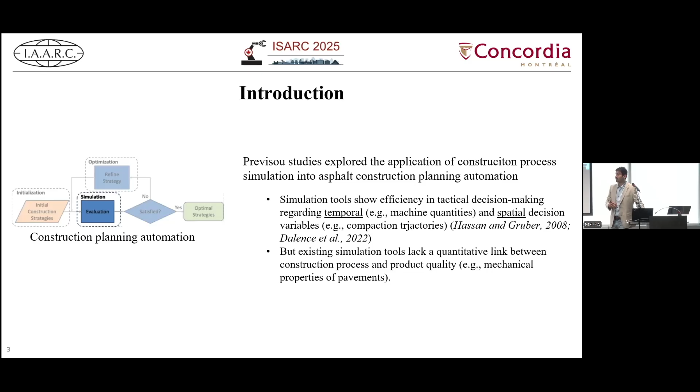And there are no, let's say, technical supports for the planners and the tactical teams to be able to understand and evaluate their different strategies. And normally they rely on their own past experiences. So over the past few years, focusing on hot mix asphalt specifically, we tried to develop simulation tools that would allow the tactical team to play around with their compaction strategies.

And when I talk about compaction strategies, it's mainly about the temperature window that the operators have in order to compact the asphalt. And that temperature window is actually quite small because you can't compact the asphalt when it's too hot. You can't compact it when it's too cold. So getting that compaction window right and then steering the entire process so that all the compaction is done within that time frame is quite tricky.

But then the main problem with all these simulation models that we've developed, and these are high fidelity simulations with very precise visualization, is we assume if a certain number of compaction passes are done at a certain temperature, the asphalt quality is good. And that's a wrong assumption. Because a lot of times, especially with warm mix asphalt, because you have a lot of additives, the way the material would respond to the changes in your strategy would be quite different.

So inherently, you need to incorporate some sense of physics into your model so that once you're simulating, let's say, different strategies of compaction, the asphalt material would also react in a sensible way to how these strategies are being manipulated.

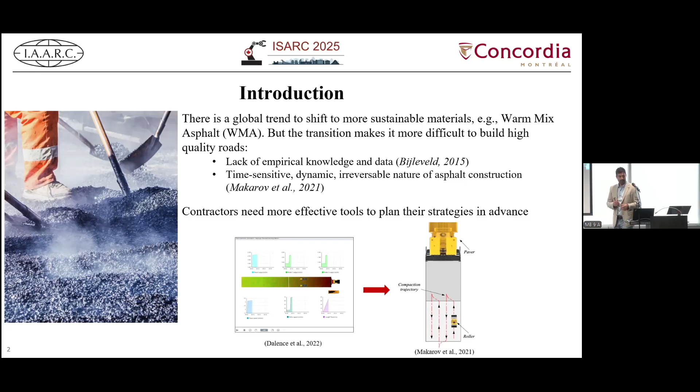So if you look at different approaches that we have for modeling the behavior of material in general, the most sophisticated, well-studied approach is using numerical models, or what we call physics-based models, that are inherently based on particle simulation. So you try to simulate the contact principles or mechanism between two particles, and then you can calibrate it for any type of material, and then you will be able to mimic the physical behavior of different materials, including asphalt.

Of course, this is a very well-studied subject. A lot of people develop physics-based models, but then the problem is when you want to bring that model into a tactical planning tool where you want to do simulation of 1 kilometer of asphalt road, it's not going to work. These are very, very slow tools. Each run of this simulation, depending, of course, on the machine that you're using, could take anywhere between a few days to a few months.

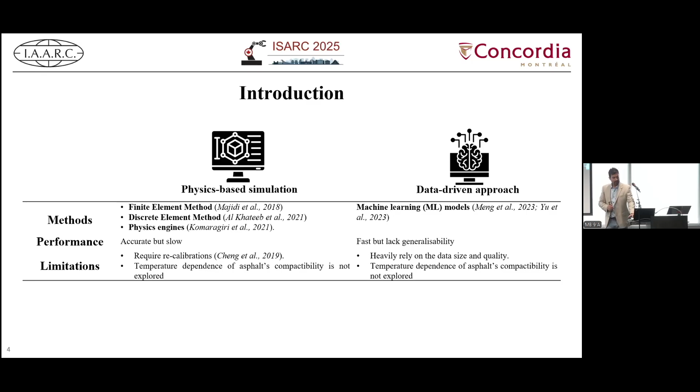And that's for a very small sample. And now we are talking about a very long stretch of road, and you would like to use that kind of numerical model. It simply would not work. And that's why the application of most of these physics-based models is limited to, let's say, laboratory testing, some initial testing, and never actually into tactical planning. So that was the problem that we faced and tried to address.

And our approach is surrogate modeling. So surrogate modeling essentially is whenever you're dealing with a very computationally intensive physics-based model, you try to develop an approximated model of that complex simulation using some random data generated from that simulation model, and then applying machine learning on that randomly generated data set.

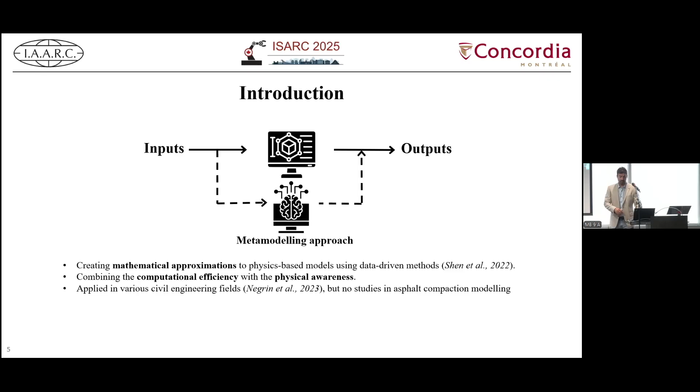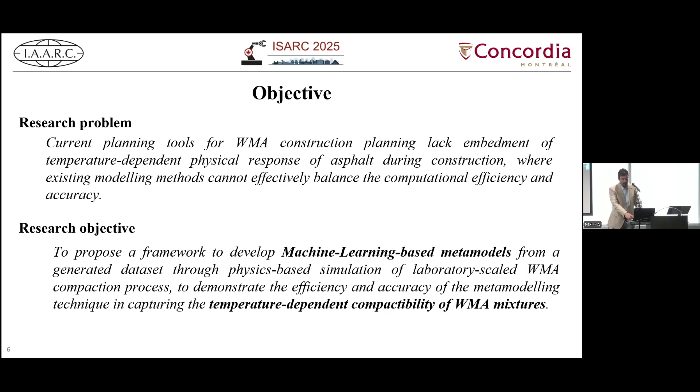And if you're able to approximate that model with your machine learning method, then you are basically substituting that complex computationally intensive model with a model that is far more efficient in terms of computation time and computational effort required. So that has been the main objective of this research. Are we able to develop a surrogate model for warm mix asphalt? And well, we knew that the answer is yes, but the main question is, how can we do that? What are the steps that we need to take in order to develop a surrogate model for warm mix asphalt? So the approach is rather simple.

So Shen had to spend a lot of time looking into different contact models that are available, pick the one that could be best calibrated for warm mix asphalt, perform proper testing of that physics-based model to make sure it's accurate enough, and then go through this design of experiment setup where he tries to build a database that would cover the entire range of possibilities of that physics-based model with a few random shots, and then try to develop a machine learning model on that data set and evaluate to what extent that surrogate model could be as accurate as the physical model.

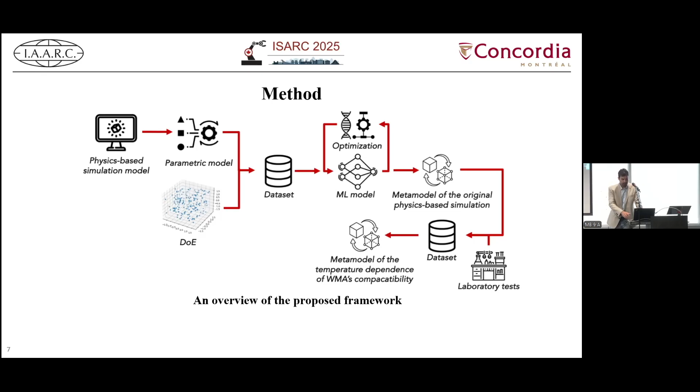And then you can use that surrogate model for whatever task you want to do with that physics-based model in more integrated platforms, such as the tactical planning tool that you would like to develop. So this is the physics-based model that Shen developed. And the idea is he tried to mimic the gyratory test, because that's the test that we are going to use in order to calibrate our model and also assess to what extent the material is actually representative of the actual physical mix that you want to use on site.

So he developed this gyratory compaction test in a numerical model, and then he applied the contact principles, and the entire asphalt behavior could be regulated by 4 main parameters. One is the elastic force between 2 particles, the damping between different particles, and also the aggregate size of the different aggregates, so the composition of the aggregate mix. And also the additive that you would add. So these 4 different elements would allow you to model and mimic any kind of mix that you would like to use in your actual project.

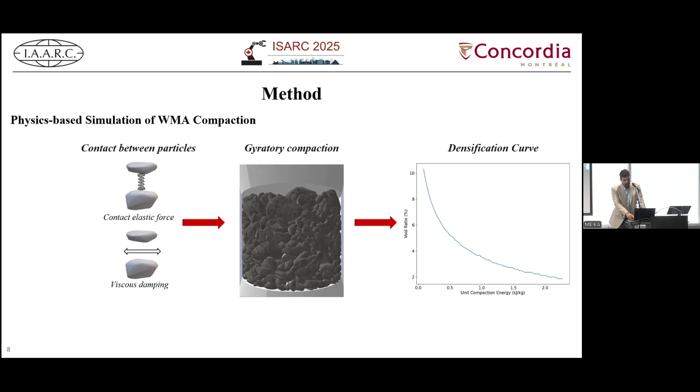And then he did a design of experiment. He looked into different parameters and the possible ranges of values that you could assign to the different variables. He applied an established design of experiment method to generate a lot of random data. It should be random, but at the same time, it should have a fair distribution and representation of all possibilities across the entire continuum of solutions that could be potentially covered by this physics-based model. And then he actually created 500 instances of different types of mixes.

And this practice by itself took him, I think, if I'm not wrong, three to 4 months just to be able to build this data set. And that would tell you already how difficult it is to use this kind of physics-based model. And then again, don't forget, the scale of his model was only this very small cylinder, not kilometers of road. And then each run would take 1 week or 2 weeks, if I'm not mistaken.

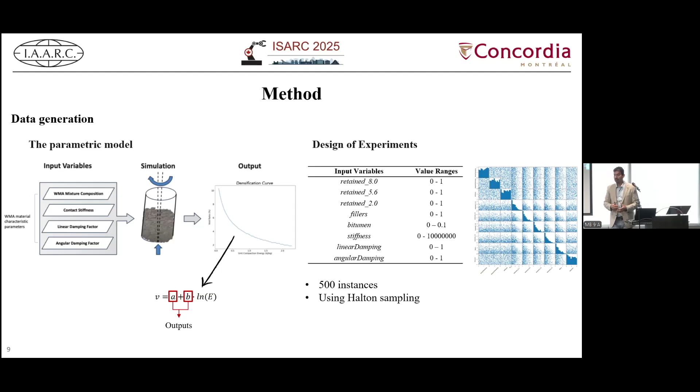So with that, he tried to apply different types of machine learning on the data set that he built. And then, of course, he did some analysis of the models to see which one is more accurate. And again, based on all the previous experiences that we had with similar types of research, as expected, random forest was identified as the best fit for the data that we have. And then we got quite acceptable performances for the multi-output random forest.

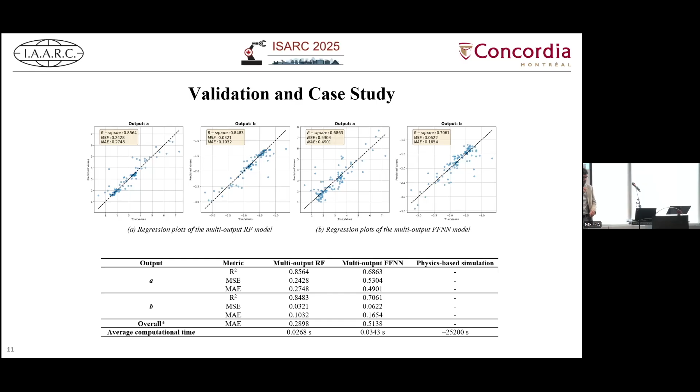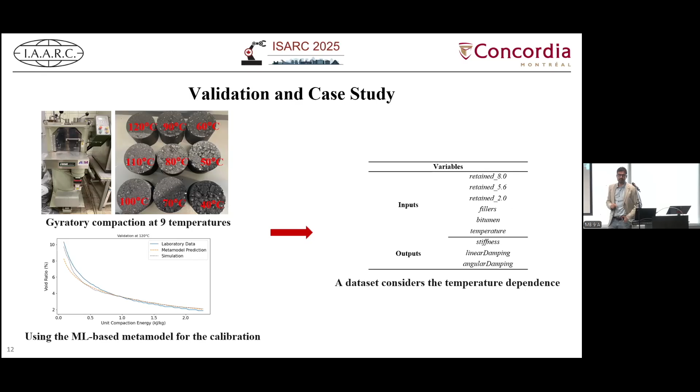What we did for the validation, now instead of using the actual physics-based model, we tried to use the surrogate model that we got, and then we did some laboratory tests. So we went to the laboratory, we picked up a warm mix asphalt, we did the gyratory test, and then we got the densification curve out of the test, and then we tried to see if we can use a meta model to calibrate the model for that specific mix. And the most important factor for the success of the model, of course, is the goodness of the fit of the curve. We got pretty good numbers.

As you will see at the higher temperature, another main advantage of this surrogate modeling approach is that these physics-based models are normally developed for only one temperature. So they assume that the asphalt temperature would remain at 100 degrees. And this is not the case, because when the temperature decreases, the physical behavior of the asphalt would also change. So if you really want to model the physics properly, the physics model needs to be temperature sensitive. And you can't do that with the existing physics-based model, because incorporating variation with the temperature would add a lot to the complexity of the model.

But with the meta model, that's actually quite simple, because every run of the model would take a fraction of a second, right? So the whole calibration of the model for a whole mix, considering temperature variation, would take only a minute or two. So that opens a lot of doors for us to be able to use this kind of physics consideration in the model.

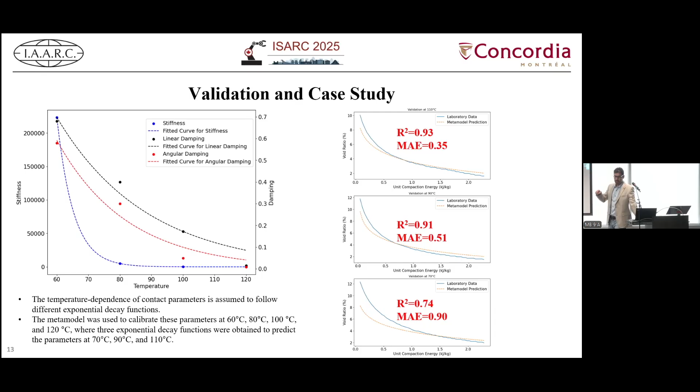So what we saw at the higher temperature, the performance of the model is very good. But as you can see, when the temperature goes down, the accuracy of the model goes down. So I actually had this discussion with Shen a week before I came here, and we looked into the causes of that. He had his own justification, but when we looked at it, the problem was his design of experiment. So at the lower temperature, the data that he had in his data set was actually not sufficient, or it was undersampled compared to the other temperatures.

So he had to beef up his data set so that he has more representation at the lower temperature. So I told him, can you do that before the conference? And then he said, no, it's going to take another 2 months. So that's why I could not actually have the updated values of these curves, but we are quite confident that more or less we will get the same type of accuracy for all temperatures once the data set is more level and more uniform.

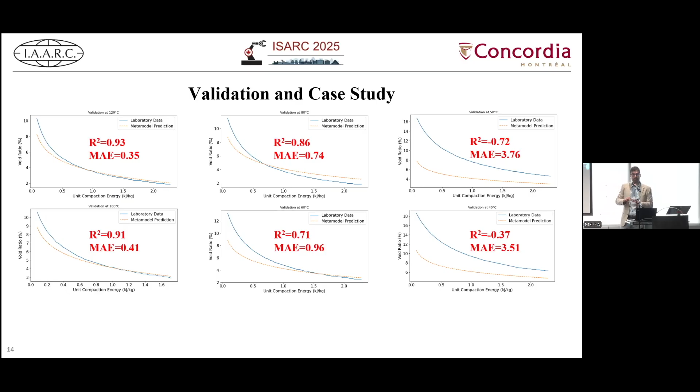So to conclude, the key finding was that we are definitely able to develop meta models to surrogate or substitute complex physics-based models of the asphalt. And the next step for us is to actually scale this up. So now we use this meta model only to replicate the gyratory test. But what would happen if we go to the much larger scale of a stretch of road? In terms of computation time, how much would that take?

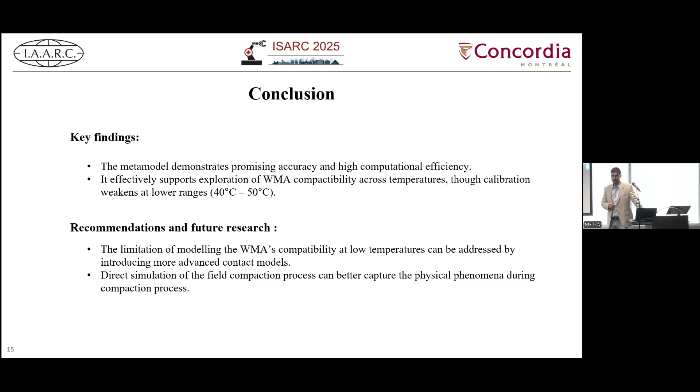And of course, we need to make some additional simplifications. I'm not going to go into detail, but maybe you need a surrogate model of the surrogate model to be able to scale it up for the entire stretch of road. So those are the future steps of his research, and Shen is going to be busy with that over the next year. Yeah. So that's it for the presentation.